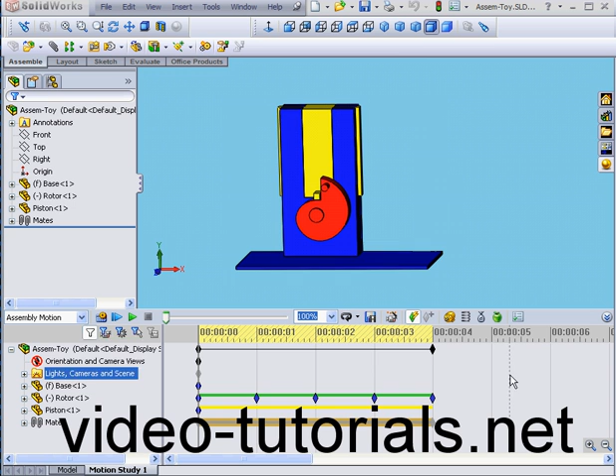Welcome to our tutorial on using angular mates. We're going to pick up where we left off in our previous tutorial with the toy. In this tutorial, I'm going to use angular mates instead of distance mates to rotate the rotor.

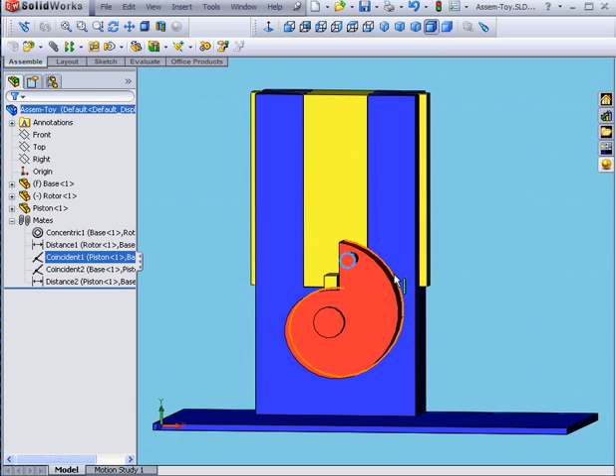Let's exit Motion Study. Go back to our model. Currently, I have two mates for this rotor, concentric and distance. The distance mate is simply an offset between the rotor and this face. I'm going to click Mate. Let's right-click and clear selections.

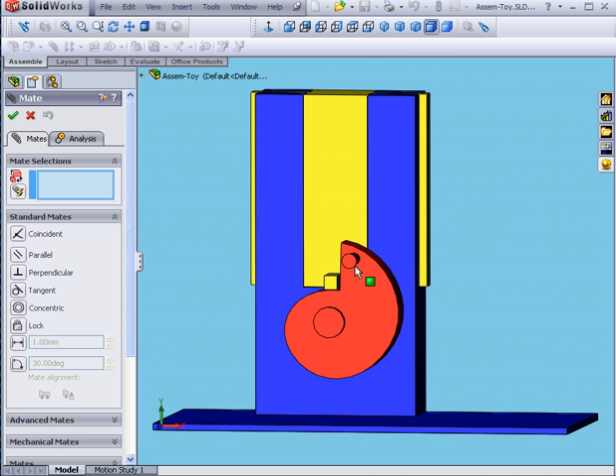I'm going to create this mate in a way so that the initial rotor position is 0 degrees. And then it'll move to 90, 180, 270, and 360. It's easy to do this way, and it's less confusing for SolidWorks too. I'm going to select this face, and then this face. Now we select Angular Mates, enter the value at 0 degrees,

Tab, OK. Next, I need to check the angle calculation clockwise. Basically, I increase the angle value, and the rotor moves in a clockwise direction. If that's not the case, simply check Flip Dimension. Let's go back and enter a value of 0, Tab. At this point, I'm ready to click OK, and OK.

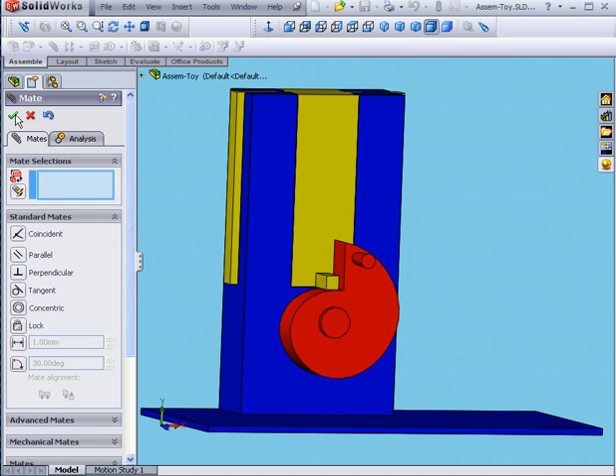Let's return to the Motion Study tab. SolidWorks asks me if I want to update the time zero keys back to valid positions. Let's click Yes. Previously, the key was red. Now it's blue. Let's highlight our key points and delete them. Next, expand the Mates branch. Here's my angular mate.

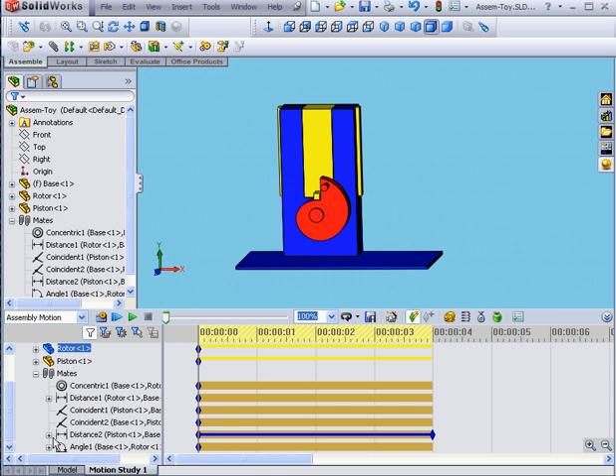Let's bring the time bar to the 1 second mark. Double-click on our angular mate. Let's move the slider to 90 degrees. OK. Let's drag our time bar to the 2 second mark. Double-click on our angular mate. Move the slider to 180. OK.

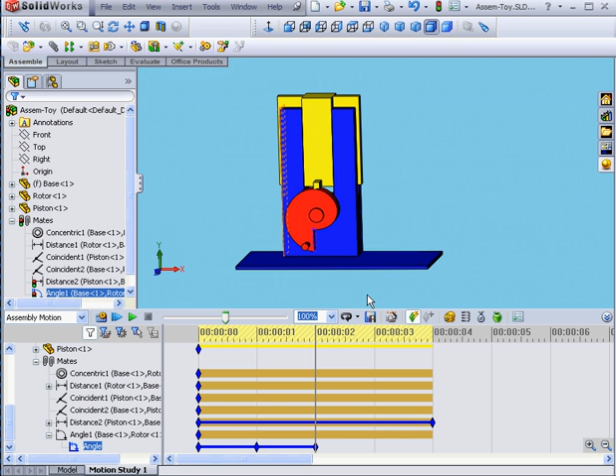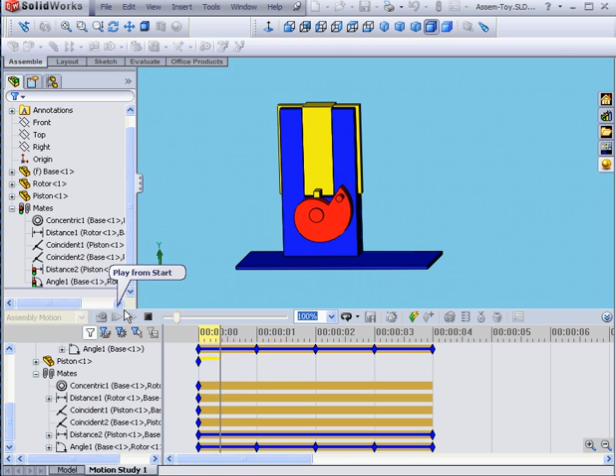Now let's move the time bar to second 3. Double-click on our angular mate. Slide up to 270 and click OK. Our last move is at the 4 second mark. We double-click and move the slider to 360. Let's click OK. Now let's calculate. Here is our preview. Everything seems fine. Let's press Stop.

In a situation like this, it's important to watch for this particular problem. Let me double-click. 360, as you see, is actually equal to 0 degrees. But if I put in 0 and click OK, let's recalculate to see what happens. Let's press Stop. You can see that the rotor doesn't move consistently in one direction.

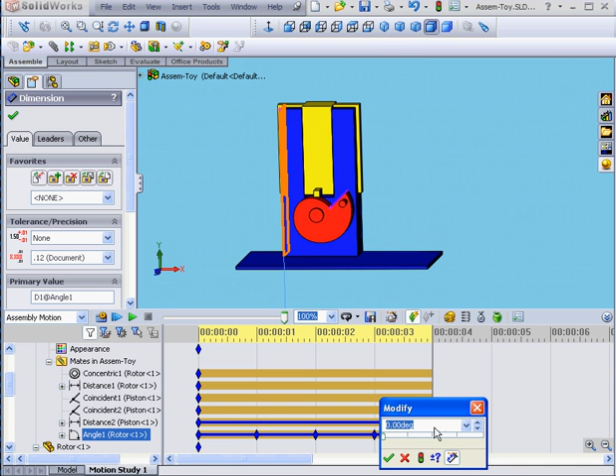Let's return the value to 360 degrees. Double-click. Move our slider up to 360 and click OK. Now let's run our calculation. Each time you make changes, you need to make sure you run the calculation. Now everything appears to run fine. Let's click Stop.

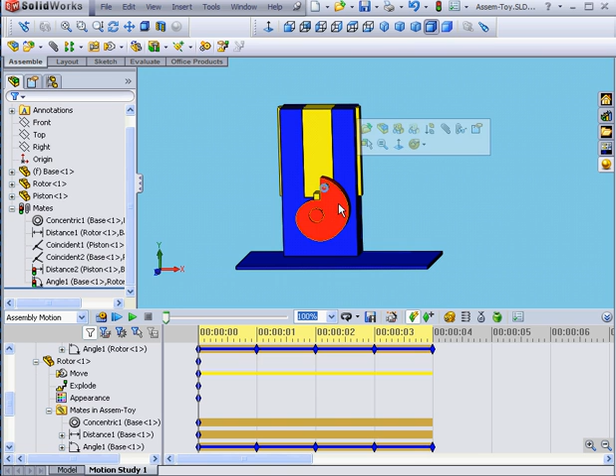For the initial position, if I'd used this face, for example, it would have made the initial angle 90 degrees. I'd need to have calculated starting from 90 degrees, then 180 here, 270 here, 360 here, and back to 90. Unfortunately, this probably would have confused SolidWorks, and we would have ended up with some similar inconsistency in our animation that we just saw when I changed the value from 360 to 0 degrees. You need to watch for these types of issues when using angular mates.

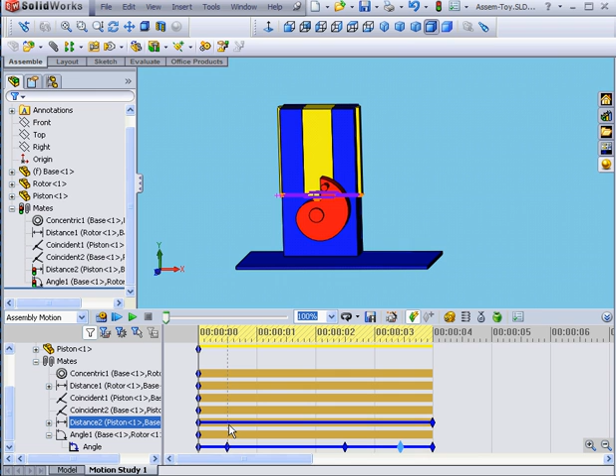In a situation like this, I could have simply used two key points at 0 and then 360 degrees and no intermediate points at all, but they are useful, for example, if I want the rotor to move at, let's say, different speeds. Of course, in order to match the piston movements, I need extra key points in the distance mates change bar. I'm going to skip this for now and click Calculate.

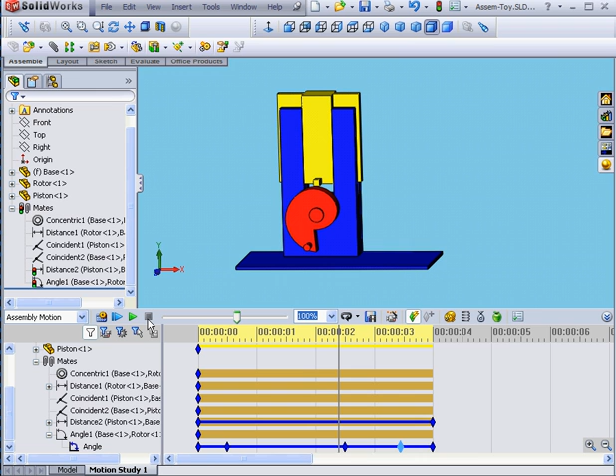You see now that the rotor moves slowly, and then it speeds up. However, the movement of the piston doesn't match the movement of the rotor right now. Let's click Stop. And this concludes our tutorial on using angular mates.